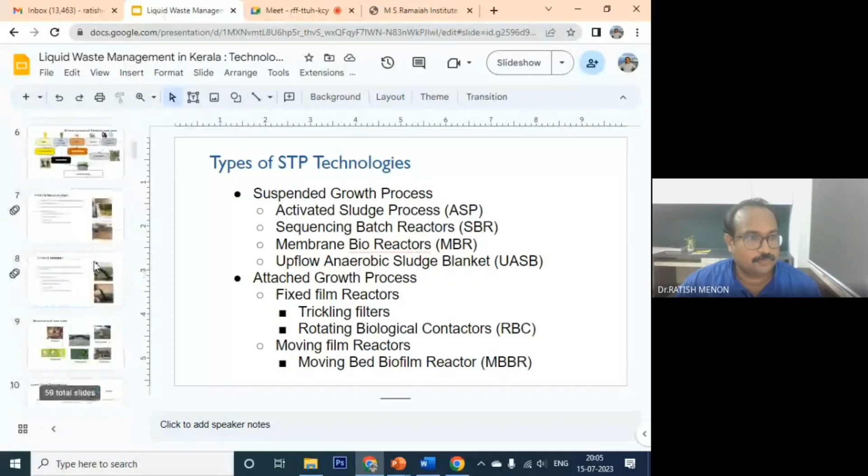Thank you. So today's topic of discussion is liquid waste management. As mentioned earlier, it is not only for Kerala, but liquid waste management is a problem for entire India. Among different states, in terms of liquid waste management, Kerala is lacking a lot of things, and a lot of efforts are being put in by the government to bridge that gap and excel in this domain. So it is a good time to have a discussion on liquid waste management technologies, as well as the different challenges we face in the state. Some of these challenges will be common, but some may be typical to the Kerala context. So that's the importance of today's topic.

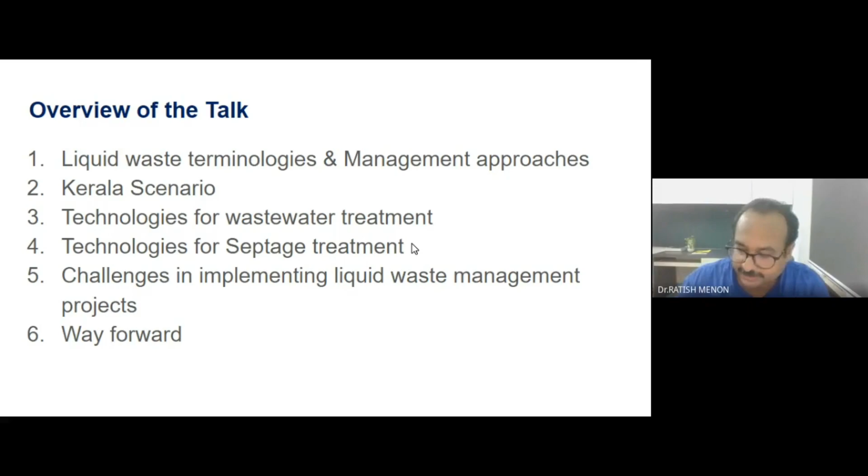Then we discuss the challenges in implementing liquid waste management projects in the state, as learned from previous projects executed in Kerala, like Amrit Kerala and Swachh Bharat Mission. All are working restlessly to implement several liquid waste management projects. So what are the challenges we are facing while trying to implement these projects? And finally, we open up our session for a panel discussion on what is the way forward for liquid waste management in the state. So that's how I have planned today's lecture.

So first, we will go through the liquid waste terminologies and management approaches. If you look at water, we always talk about water security. You would like to have water 24/7, but the water is getting scarce day by day. One of the major reasons for that scarcity is pollution of water sources, and not treating the water that we use becomes used water. Not doing enough treatment to this used water becomes a major cause of pollution and increases the water scarcity. The availability of good quality water reduces because of the surface pollution.

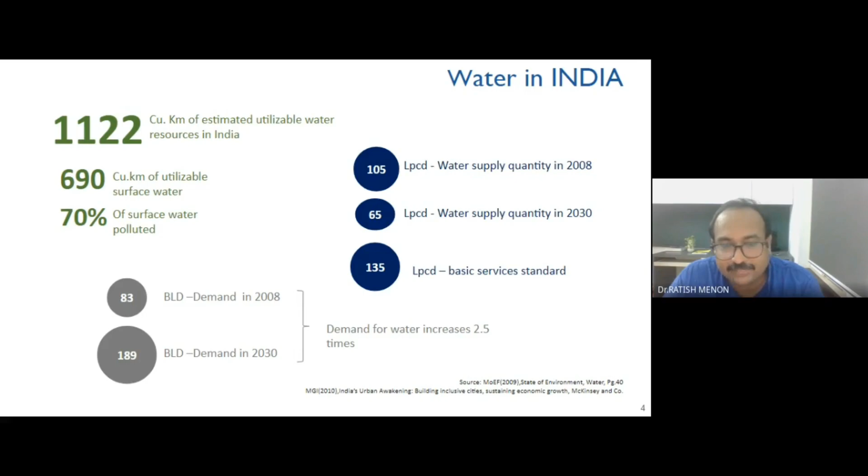So 70% of the surface water is estimated to be polluted now. As we move forward to another decade, by 2030, the scarcity is going to increase. The amount of water is going to reduce. The availability of good quality water is going to reduce. But at the same time, our lifestyles increase, our urbanization growth, and the demand for water is going to increase. So there will be a great divide between the supply and demand.

Now, looking at the per capita water consumption in urban areas, we are aiming for 135 LPCD, considering different activities like drinking, cooking, bathing, washing of clothes, washing of utensils, and so on. And we find it very difficult to provide this 135 LPCD adequately in Indian cities.

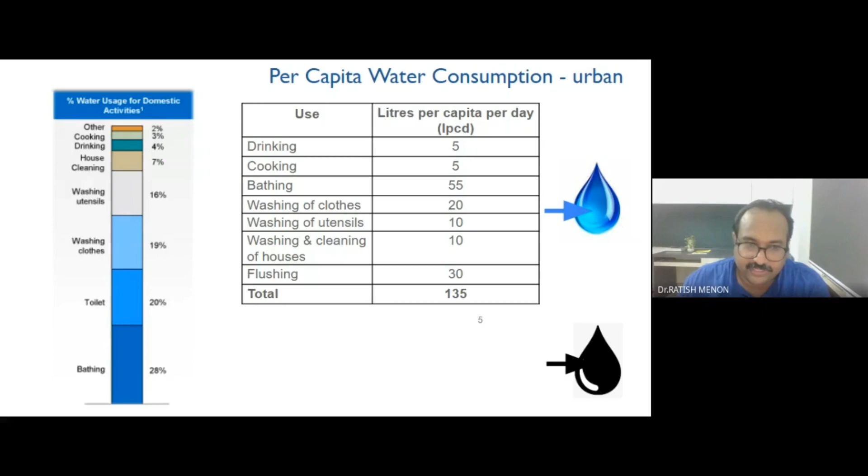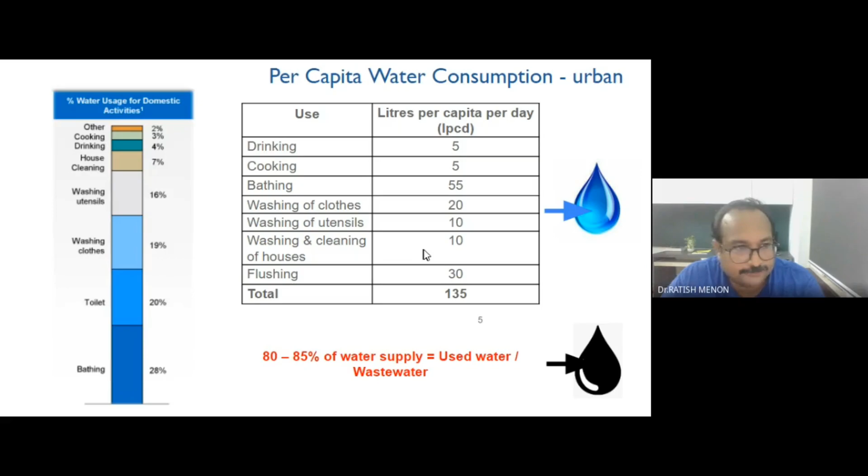And as we know, once we use this water, whatever water we are getting, 80 to 85% of this water supply becomes wastewater. So we talk about supplying water to homes, but we are not very much bothered about collecting it back, treating it, and then releasing it to the environment. So this 85% of used water is now being left out into the environment, thereby increasing water pollution and reducing the availability of good quality water. That's a major concern that we are having.

Now, looking at the sources of liquid wastewater, when we say liquid waste, we mainly talk about the domestic wastewater that we are receiving from cities. Depending on the nature or characteristics of this used water, we divide it into different color coding systems. So we have major categories: black water and gray water. This doesn't have anything to do with the actual color of the water, but it is color coded to indicate the content of the water. Black water means the water that contains fecal matter, so water coming out from toilets or urinals is called black water, and gray water is water that comes from different activities which does not contain fecal matter, for example from the kitchen, bath, laundry, etc. Black water combined with gray water, we use the term sewage. That's a general classification of used water.

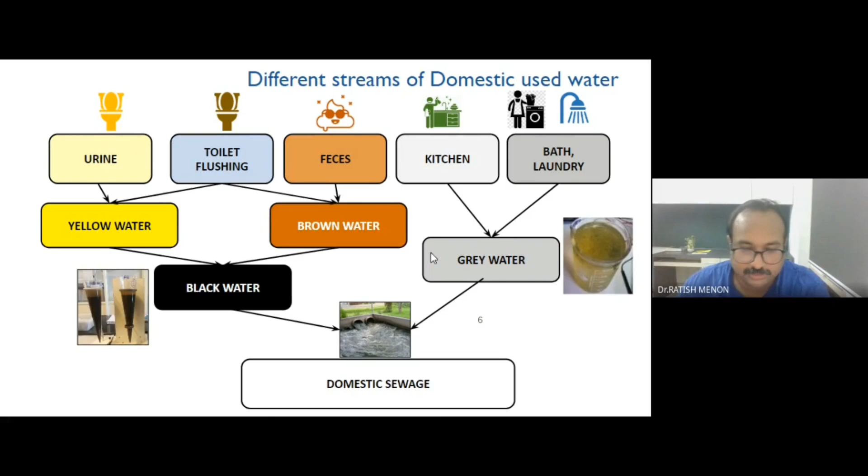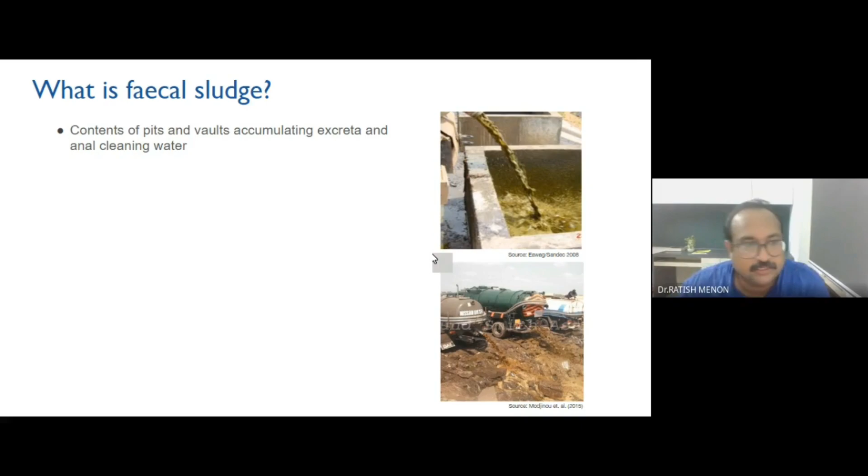Now, domestic sewage has both gray water as well as black water, and another term we should know is fecal sludge. When human excreta is contained in a pit, the sludge that we store or accumulate in that pit is called fecal sludge.

It has a very high solid content compared to wastewater, because the water content is lesser in the fecal sludge, and it is relatively fresh and the color is yellow, and it has low dewaterability, but it has higher BOD.

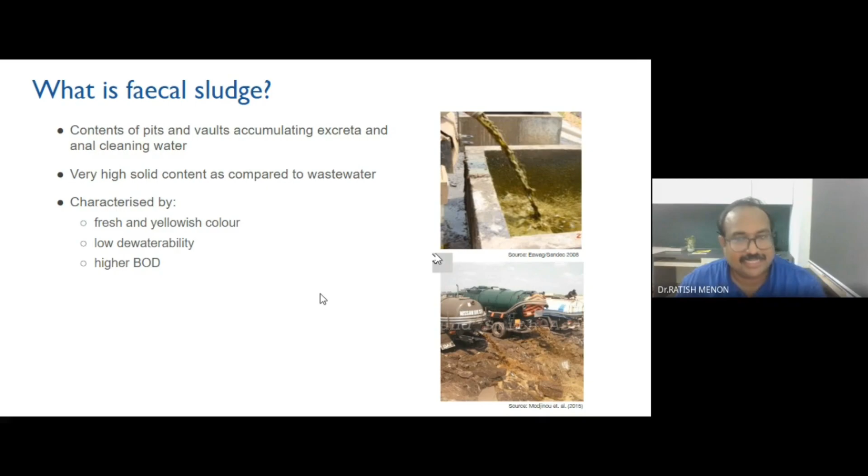BOD is a term that we generally use to indicate the strength of the wastewater. It is the amount of oxygen needed for microorganisms to degrade the organic components in the wastewater. So higher oxygen demand means higher strength of the waste. Fecal sludge has higher BOD compared to sewage.

Therefore it needs high degree of treatment before being released into the environment. If we are releasing a high BOD waste into a water body, for example, the microorganisms will start decaying that organic matter, and for that they will consume dissolved oxygen in the water. If the dissolved oxygen is consumed, it creates an anoxic, anaerobic condition within the water body, and that can cause problems to aquatic species. Aquatic animals may die out because of that.

So we can't just let this fecal sludge or sewage be disposed directly without any treatment.

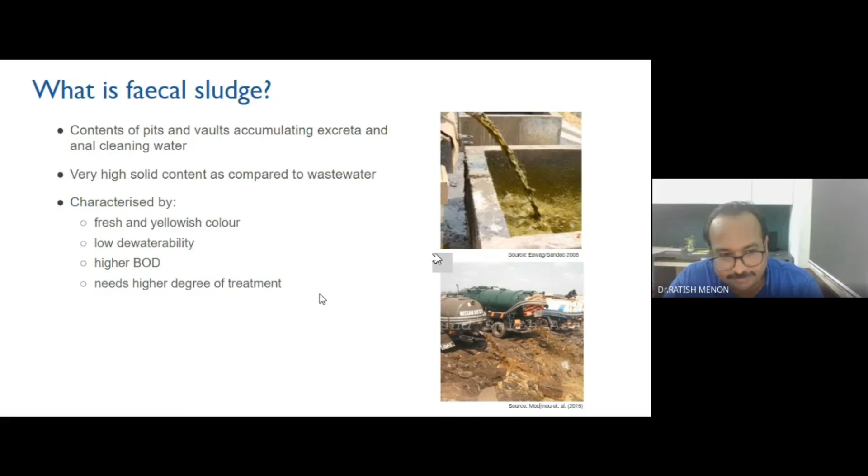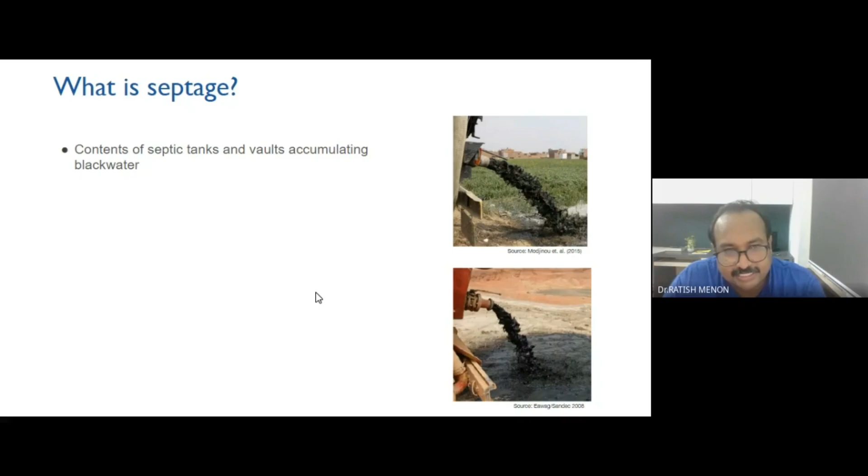Now another term that we use is septage. Septage and fecal sludge are different in a way - they both have high strength waste, high solid content, but septage is well digested compared to fecal sludge. It is the sludge that we take out from septic tanks. I will talk more about septic tanks in the later slide.

Septic tank is a system commonly used in Kerala for treating domestic wastewater. The black water from toilets is contained in the septic tank, which is basically an anaerobic biological reactor, and in that the organic matter gets well digested.

Now the digestion is only about 50 to 60%, and the remaining sludge needs to be taken out after 2 or 3 years, because the undigested part will start filling up the septic tank, reducing its efficiency. So we need to empty the septic tank once in a while, within 2 to 3 years. And this cannot be left without treatment, because there is still 40% organic matter that is not digested. So we have to have another treatment for that.

But the sludge that we take out from the septic tank, we call it septage. It has high solid content, but has lower BOD compared to fecal sludge, because it has already got digested inside the septic tank. So it needs a lower degree of treatment compared to fecal sludge.

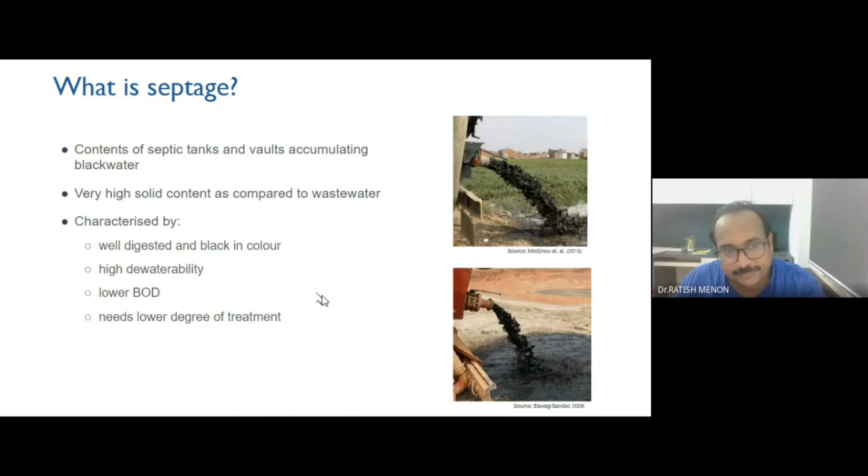Now looking at used water or wastewater, what are the different constituents? The wastewater contains organic matter, which is biodegradable, meaning microorganisms can act upon it and stabilize it. Then we have inorganic matter, inert materials. We have nutrients - nitrogen, phosphorus, and potassium. Then we have chemicals.

Recent developments in bathroom cleaners now contribute a lot of chemicals into the wastewater or sewage. So we have some chemicals and we have pathogens. Pathogens are the microorganisms that can cause diseases in human beings.

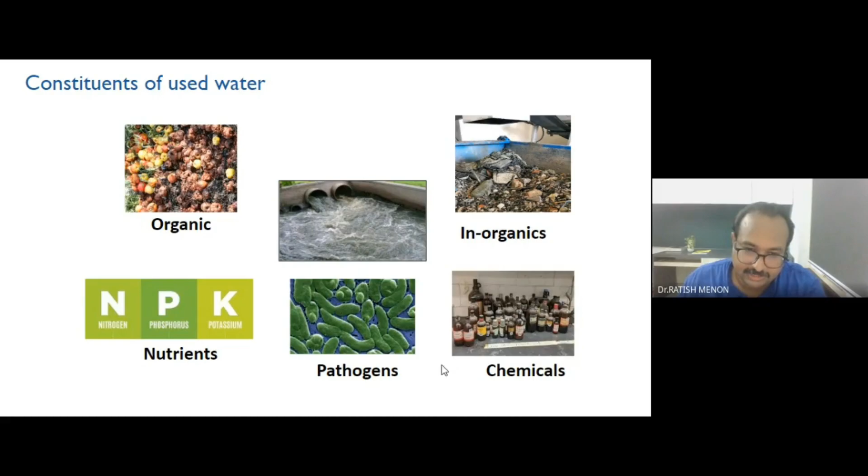Now looking at liquid waste characteristics - we mentioned fecal sludge, septage, and sewage. Looking at the major parameter called COD or BOD, it will be very high for fecal sludge, then septage, then sewage. Sewage is a little more diluted because it has more water content. Total solids also very high for fecal sludge, comparatively lower for septage, and lower for sewage. So the treatment we do for septage and fecal sludge is different from the treatment we do for sewage.

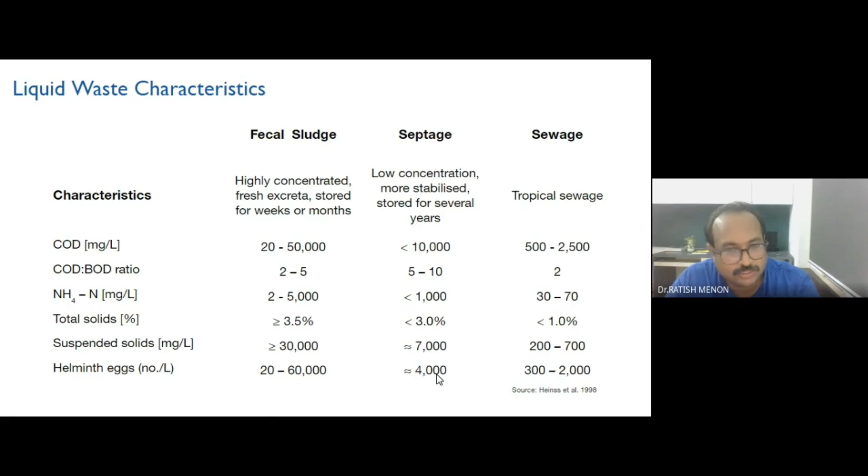Now, what happens when we release this wastewater into the environment without any treatment? There are two impacts - one is impact on the environment, and another is on public health. When we release it into the environment, it pollutes the surface as well as groundwater.

Contamination of fresh water results in biodiversity threat, and it affects the ecology, especially aquatic ecology. Then it affects socioeconomic and cultural aspects of the project area. For example, nobody would like to live very near a dirty canal or a dirty pond. So socioeconomically, land prices may fall, and poor people may have no other choice but to live very near this polluted water body, which in turn affects their health.

And some public nuisance also - mosquitoes, flies, all things will cause nuisance because of the pollution of the water body. Then health impacts include exposure to harmful microorganisms. Polluted water may contain a lot of pathogens like cholera, diarrhea, tuberculosis, etc.

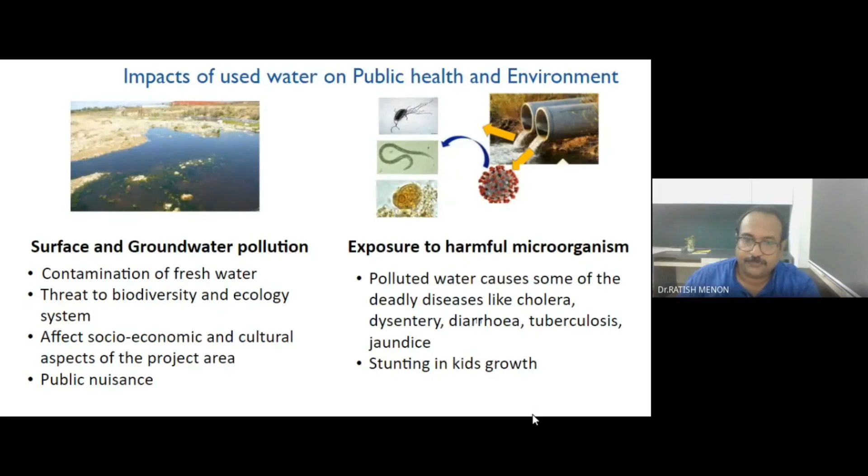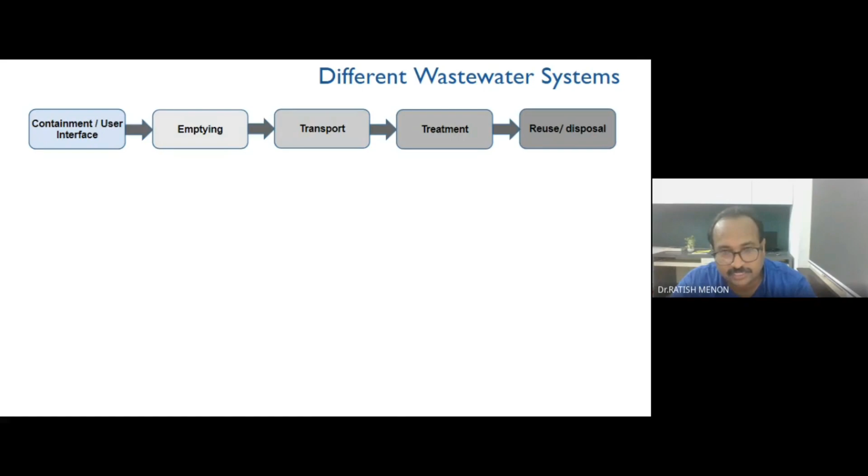Now, looking at different wastewater systems - how do we treat the wastewater? What are the different steps in treatment of wastewater? The first one is the user interface, meaning the toilet where people produce the waste. From the toilet, it has to be transported, and then it has to be treated. After treatment, normally it is disposed, or if there is a reuse value, we go for reuse. This is the general approach.

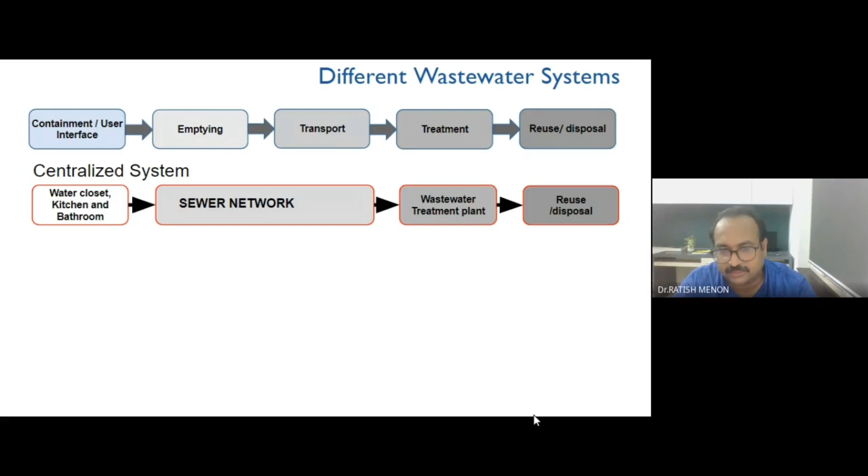There are different wastewater systems. The first one is a centralized system. In a centralized system, the different houses in the city are connected using pipes called sewers, and these pipes convey wastewater from the home to a treatment plant. So there will be only one single, big treatment plant - that's called a centralized system. All the houses are connected to this sewerage. The sewer network is called sewerage, and wastewater from individual homes is connected through this sewerage, and these sewer pipelines take the wastewater to a centralized treatment plant. There it is treated, and the water, after treatment, may be reused or disposed properly.

Another one is the decentralized treatment system, where waste from homes is taken to a treatment plant that will be smaller in size. The entire city may be divided into several zones, and each zone will be served by a different sewer network. So there will be a simplified sewer network for different regions, and more than one treatment plant of smaller capacity, and the processes may be the same. Water will be treated and disposed or reused, but the capacity of the plant will be smaller, and the sewerage system coverage will be divided into different zones, each serving different areas.

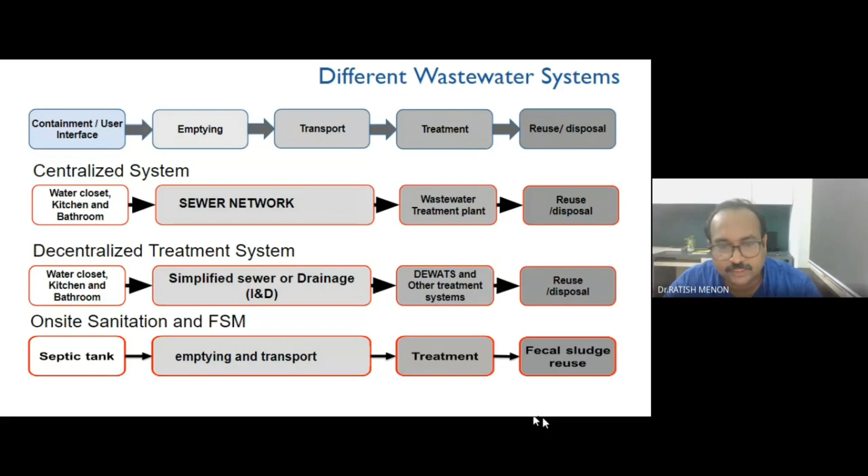The last one is the on-site sanitation or fecal sludge management system, and in the Kerala context it has very high importance, because most houses in Kerala use this on-site sanitation system called a septic tank. From the household toilets, the wastewater first goes into a septic tank, where it gets partially decomposed by anaerobic treatment - microbes that grow in the absence of oxygen work to decay the organic matter in the wastewater. Once the septic tank sludge fills up, it has to be emptied and transported to a treatment plant. This treatment plant, where the septage - the sludge taken from the septic tank - is treated, we call a fecal sludge treatment plant, or FSTP. After treatment, the fecal sludge may be used as fertilizer or manure, and the water may be treated and reused or disposed. These are the different wastewater systems adopted in different cities.

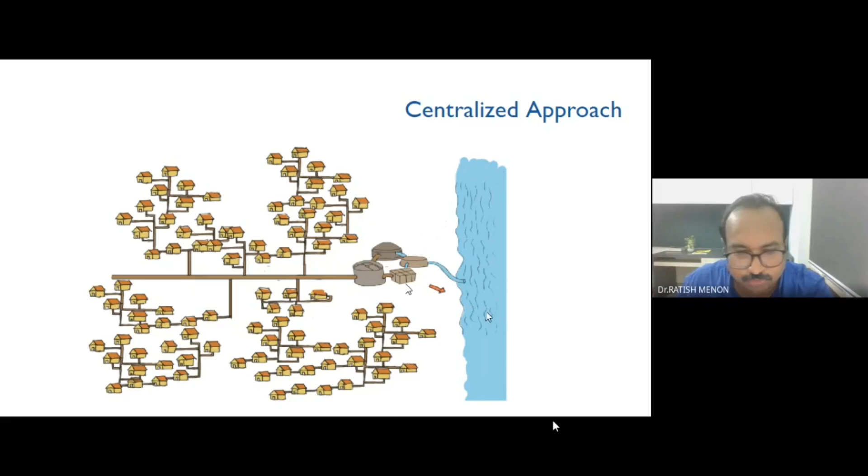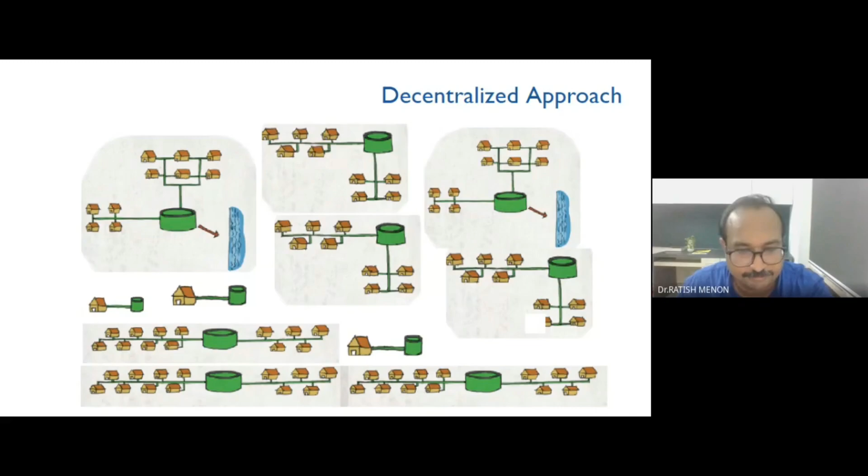When it is decentralized, the entire city is divided into different zones, and we have more than one treatment plant within the city, with different houses connected to different treatment plants depending on the urban plan.

So actually, this is called a sanitation cycle. The waste is now converted into agricultural produce, thereby completing the cycle. This completion of the sanitation cycle is very important to maintain the balance in the environment. So if any of the steps fail, then we have a serious problem.

We have to have the toilets, that is a must, and we have accomplished a lot in that aspect. Kerala is a state with the maximum number of households having toilets. All of the new houses have toilets built in. So that capture part is well handled in Kerala.

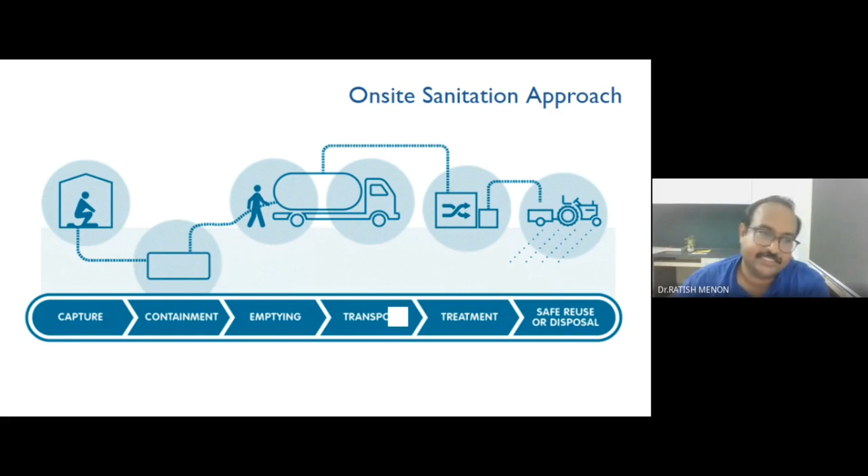FSTPs have to come in, and once they are in place, the septage can be well treated in the FSTPs, and then the treated products can be used for agricultural purpose, thereby producing agricultural produce and completing the sanitation cycle. So these are the different approaches.

Now, if you ask which approach is better, there is no single answer, because it depends on a lot of factors like local conditions, needs, cost, and time frame, which determine the choice of approach. In some cities, a centralized approach may be well suited, but for many other cities, a decentralized approach may be good. And in many other cities, an on-site sanitation system may be a good approach. So it's not that one approach is better than the other—it depends on local conditions, cost, and other parameters.

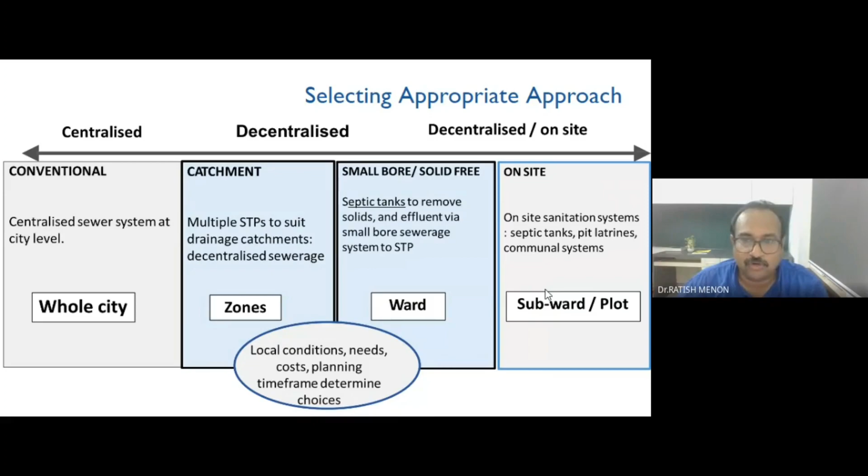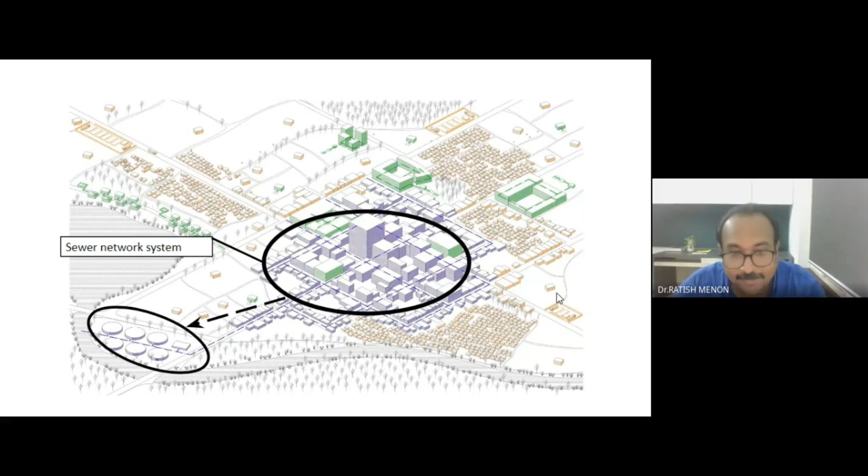But for the outer part of the city, beyond the core sanitation zone, it would be a good idea to provide decentralized systems, because the population is scattered, and connecting all of them together may not be feasible. So ideally, we provide small treatment plants in this area and go for a decentralized wastewater treatment approach.

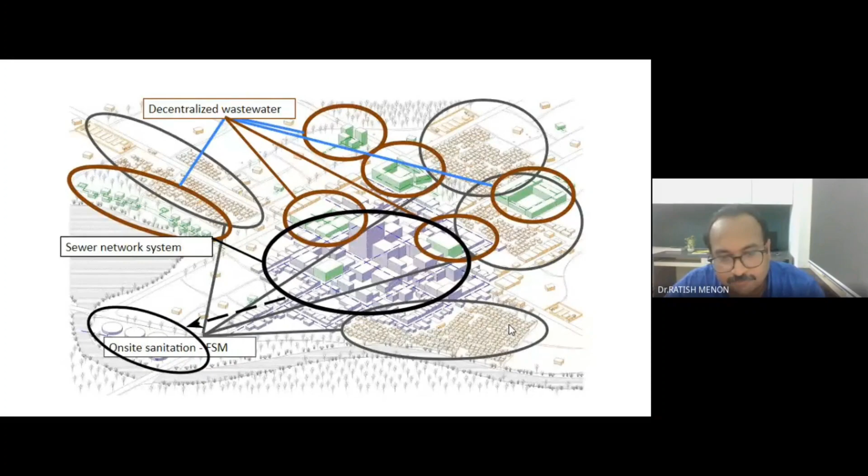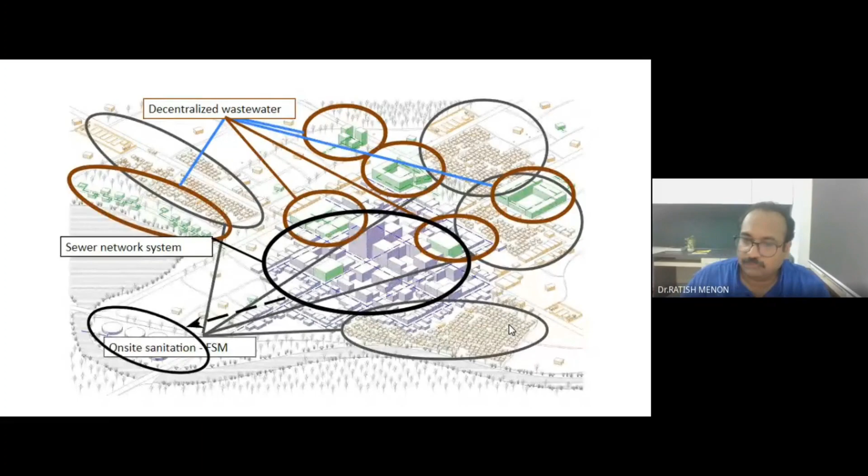And for other places where on-site sanitation systems are already in place, like septic tank facilities, we provide FSM or the treatment plant, FSTP. We carry the sludge and take it into the FSTP to treat it. So for the same city, we may need more than one approach, and that is why we call it integrated thinking, which is required to solve the sanitation needs.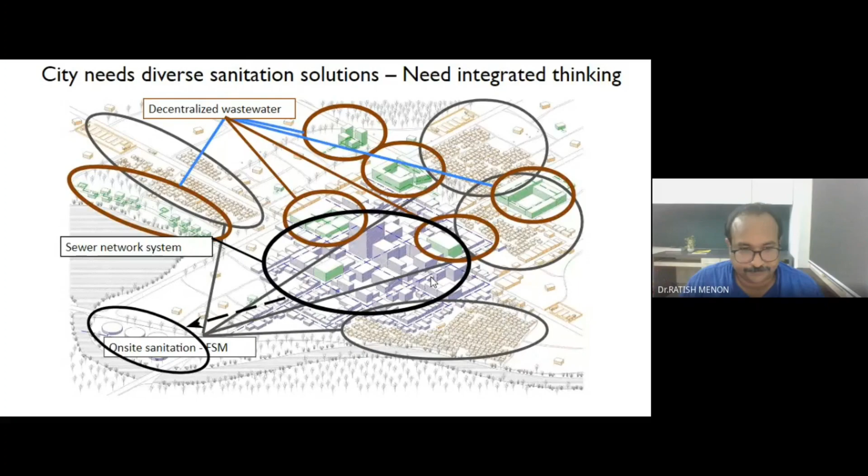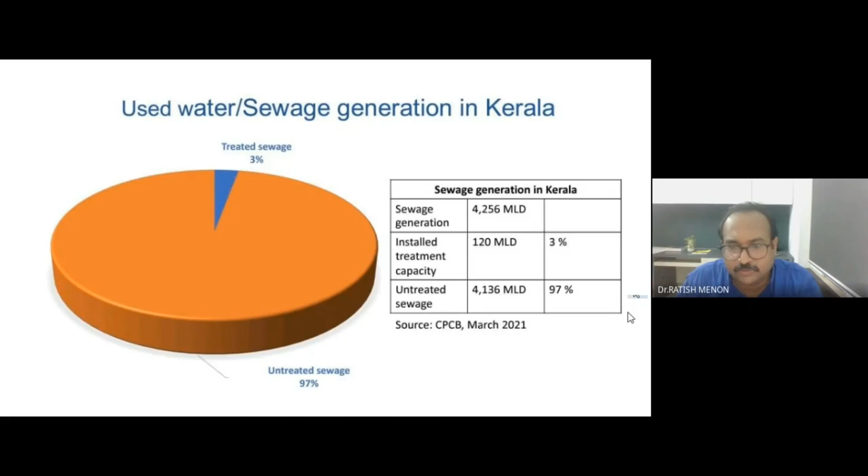Now coming over to the second part of the talk, the Kerala scenario. Within Kerala, the treated sewage is very little—only 3% of the total generated sewage is scientifically treated in Kerala, and this is what we are trying to improve. If the sewage generated is around 4,000 MLD, out of that only 120 MLD is the installed treatment capacity.

If you look at the cities with sewer networks, there are very few cities that have sewer network coverage. Trivandrum is one of the cities that has 30% or so coverage. Kochi has a little bit of coverage, but other than these two cities, we do not have much connected sewer network coverage in cities, and that is a big problem because all these cities are highly populated.

Now creating a sewer network at this point in time may be very difficult, because it includes excavation and pipe laying, and the roads are very small and not wide enough for conducting all these activities, so it becomes very challenging to implement a sewer network in the cities of Kerala.

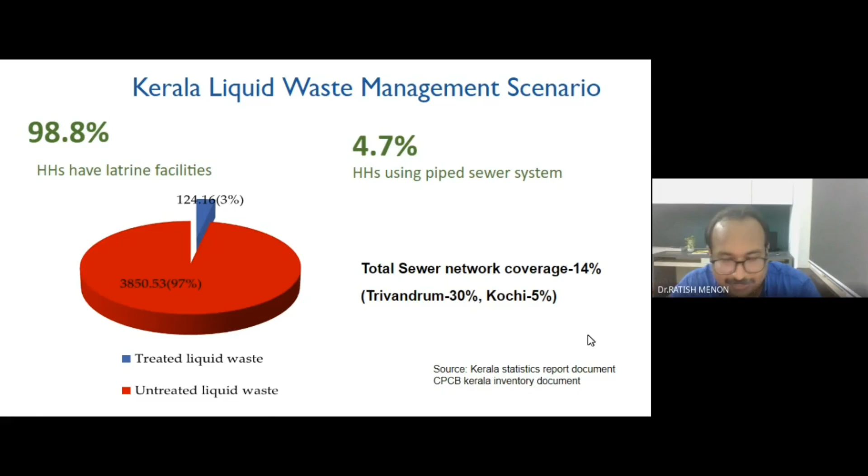So what we see here is 98.8% of households have latrine facilities. They have toilets, but only 4.7% is connected to a sewer system. That means most of them are using on-site sanitation, or they are directly throwing waste into the environment. So that's the main issue.

Under the initiative of Swachh Bharat Mission, there was a campaign to look at the quality of water in canals, ponds, and rivers in the state. And the results were astonishing, because 80% of the water bodies were found to contain coliform bacteria. Coliform, as we know, is the bacteria that grows inside our intestinal colon.

Their presence in drinking water means that fecal matter has been in contact with the water. Now why is this happening? It's because, as I showed in the previous slide, around 98% of houses have toilets, but the sewerage network is very small. So this wastewater is being let out into the environment, and we see that in major water bodies of Kerala. The streams that used to flow very beautifully are now contaminated, and in Alappuzha and other places, water hyacinth is a problem because it's getting a lot of nutrients coming into these canals, and those nutrients are nothing but wastewater.

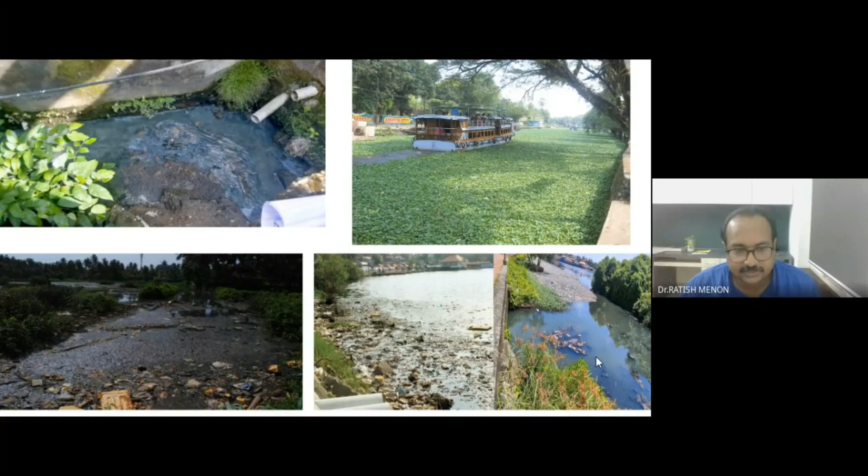In major water bodies and major canals, people are actually throwing their effluent directly into the urban water body, thereby contaminating the water as well as degrading the water body, which is not good considering the tourism value of the state. This needs serious consideration for improving the wastewater treatment scenario.

Now, looking at the existing on-site sanitation systems, one major issue is constructing a proper septic tank. Most of the time, people say they have septic tanks, but these are not really septic. What I mean is that the septic tank has to be airtight, because there should not be any oxygen inside. The bacteria that grow inside are anaerobic bacteria, which grow in the absence of oxygen, and they take around 48 hours or so to decompose this waste. So we have to hold the water for that long inside the tank, and it should only be allowed to flow out of the system after 48 hours.

So if there are cracks, or if the bottom is not lined properly, there are chances that the wastewater, before treatment, will percolate downward and reach the groundwater, contaminating it. If the construction is not properly lined, it can cause infiltration, and cracks can also prevent the tank from staying septic. Oxygen can get inside, the bacterial action will slow down, and it won't work as intended.

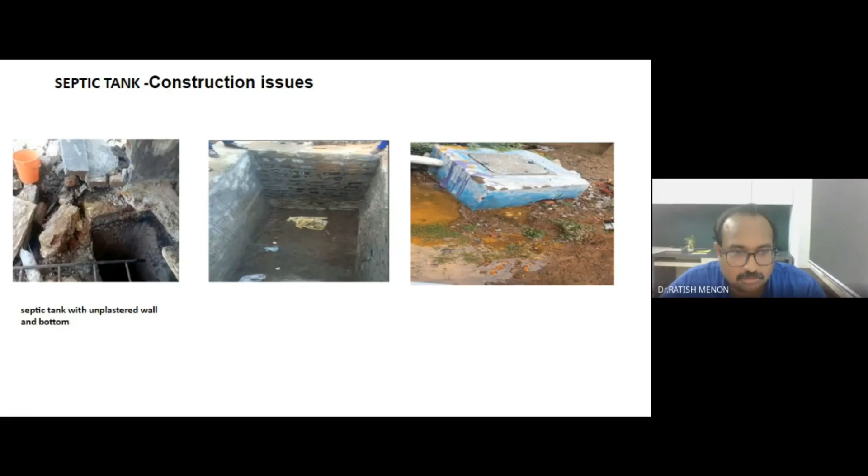You see a septic tank system here. Normally we must use at least a 2-compartment septic tank for better solid retention. When wastewater comes into the septic tank, we provide a holding facility, and there we allow the solids to settle in. The solids settle to the bottom, and the effluent then goes into a soak pit. Inside the septic tank, bacterial action takes place and the sludge gets treated.

Around 40-50% treatment happens, but there will still be sludge buildup. So after 2-3 years, the septic tank fills up with this partially digested sludge. Once it fills up, the water holding capacity of the system reduces. So instead of a 2-day hydraulic retention time, the flow may bypass, because there is no volume to contain the water for 2 days, and efficiency decreases. So it's very important that septic tanks are emptied once every 2 or 3 years to improve their efficiency. Otherwise, the septic tank will not function as designed.

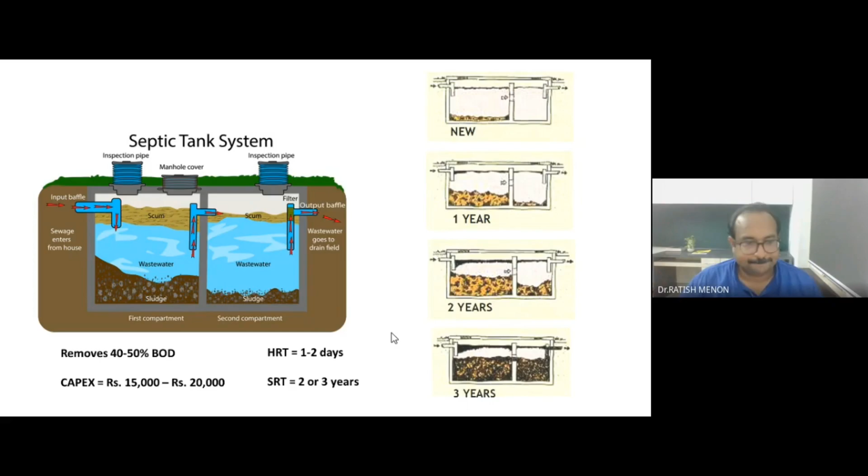The current situation is a lack of proper septic tanks at the household level. Some are called septic tanks but are not actually septic tanks. There are IS standards and IS codes for the construction of septic tanks. A lack of adequate treatment plants is a major issue, along with a lack of systematic collection, transportation, and conveyance. In some places, they collect the septic waste and just throw it out in the field.

So when we say open defecation free, we are not actually open defecation free, because unless we are treating the septic waste, it will be thrown out into the environment and have the same impact as open defecation.

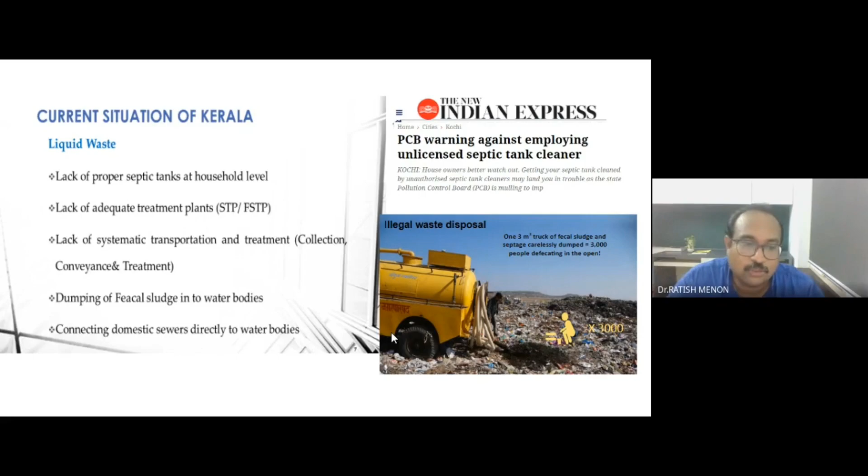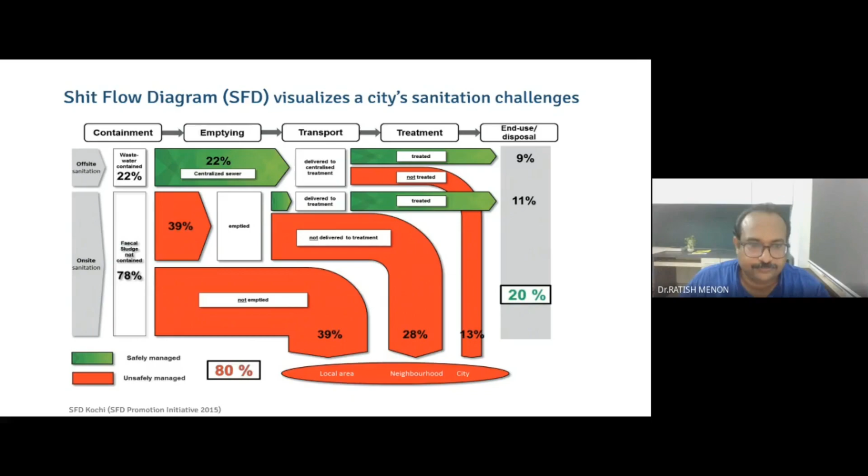Now let's look at technologies for wastewater treatment. Whatever the treatment mechanism, we use either physical, chemical, or biological methods. When dealing with domestic sewage, which has high organic content, we mostly go for biological methods because they are cheaper and also very effective in treating organically degradable waste.

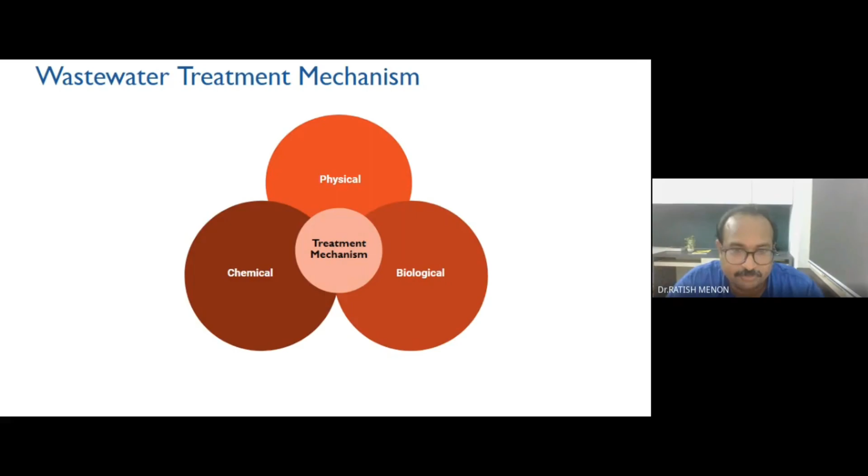The high priority objective of treatment is to make the water pathogen free, so whenever we dispose of treated wastewater, it should be pathogen free, and organic load should be reduced. If we don't reduce the organic load and dump wastewater into an urban water body, lake, or river, microorganisms immediately start consuming oxygen, reducing dissolved oxygen and killing aquatic animals. Acidic conditions may set in and it will kill the water body. So organic load has to be reduced.

Depending on how much has to be reduced, we select the treatment technology. For example, if my initial BOD is 100 and discharge standards are 10, I have to remove 90. But if my initial is 250 and I have to bring it to 10, I have a lot more to reduce.

So my processes will be different because I have to come down from 250 to 10 instead of 100 to 10, and if the initial is only 50, the process will be different again. The disposal standards are already set by pollution control codes, so independent of your incoming waste strength, you have to obey the disposal standards, and based on that difference, we bring in the treatment process.

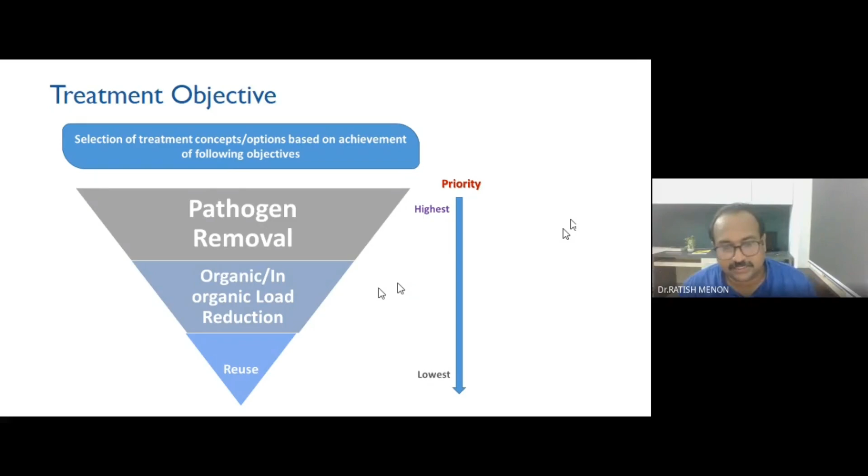Looking at sewage treatment technologies, we majorly use electromechanical or conventional treatment systems. If the wastewater quantity is small, we can go for nature-based treatment, which has its own merits and demerits. Then there are post-treatment methods like tertiary treatment with RO, where wastewater is passed through a membrane to make it good enough for drinking purposes.

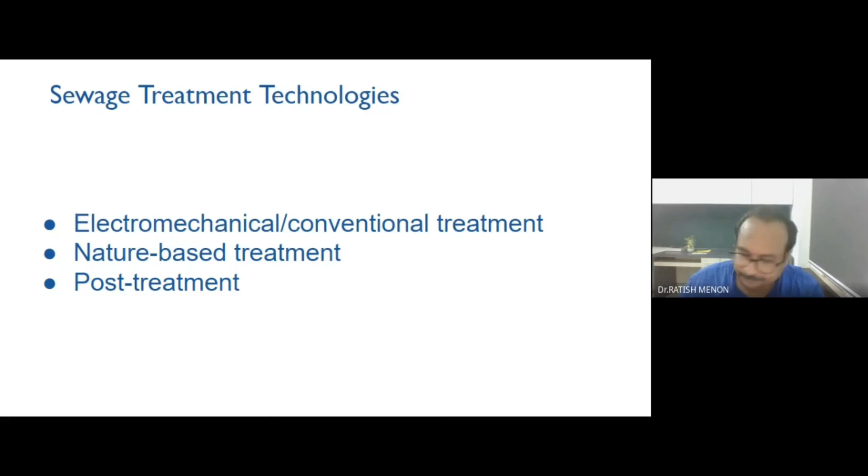In the conventional electromechanical treatment system, whatever the technology, you'll see these 4 steps in every treatment plant. The first is primary treatment, where you do screening and remove solids, then primary sedimentation to reduce the BOD load onto the treatment plant. If you can settle out the solids, you can reduce the BOD a lot, because the settled sludge can be taken out and treated, reducing the load on the secondary and tertiary steps.

Then the major component of a treatment plant is the secondary treatment system, which is essentially a biological reactor. We grow microorganisms there, and most electromechanical sewage treatment plants utilize aerobic conditions, so we have to supply oxygen 24/7 for aerobic microorganisms growing in this secondary treatment tank.

Depending on how these microorganisms are growing inside the tank and how they are nurtured, there are a number of different technologies. In secondary treatment, the basic approach is to allow aerobic microorganisms to grow inside the tank, and we provide the oxygen required to decompose the incoming waste. If the waste strength is higher, we have to provide more oxygen, so the waste has to be held in the tank for a longer time period.

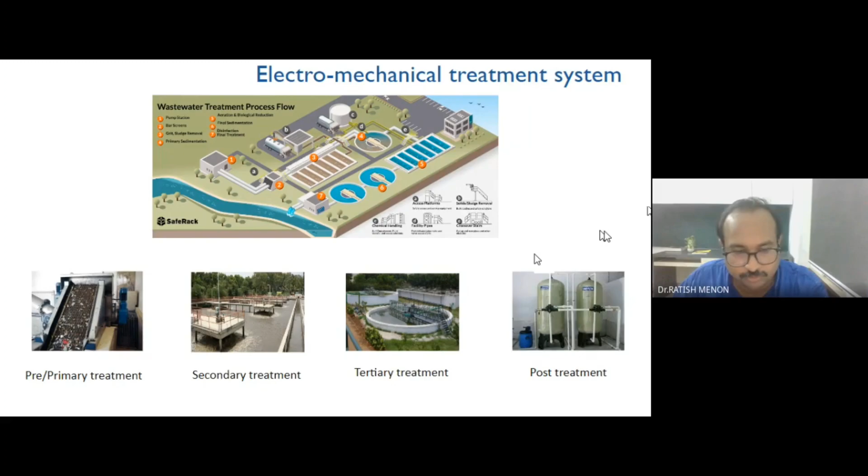Now, depending on the secondary biological reactor, this secondary treatment, there are many different processes used. The microorganisms can either be suspended inside the water in the tank, or attached onto a surface. If suspended, there are many techniques using the suspended growth process.

The popular method is activated sludge process, ASP. Then there is sequencing batch reactor, where the processes are the same, except it uses only one tank, where extended aeration and settling all happen together.

Then there is membrane bioreactor, where microorganisms are grown like in the activated sludge process, and then using a membrane, we filter out the wastewater. Once the water passes through the membrane, it will be much clearer than with a conventional system. Membrane bioreactor helps avoid a secondary or tertiary system — we don't need a secondary clarifier, which is the tertiary treatment system, if we are using membrane bioreactor.

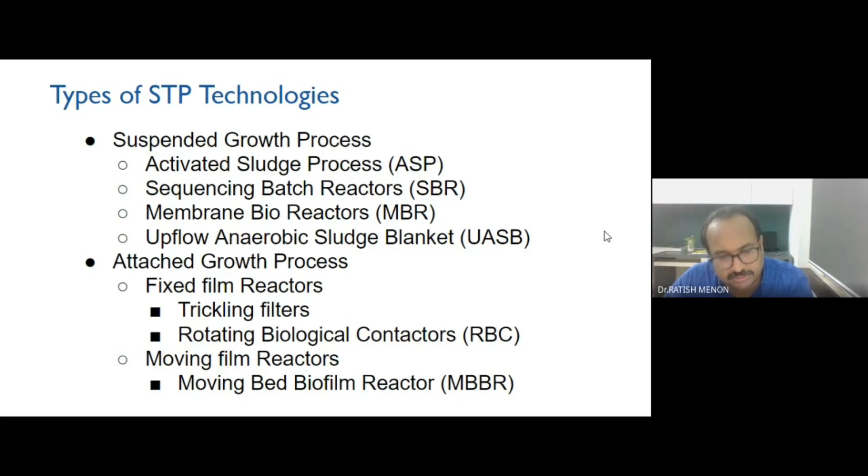In the MBBR system, you have media like these rings, and the microorganisms grow on the surface of the ring. This media moves inside the reactor under the influence of aeration, so the bacteria is moving, but at the same time growing on the surface of this media. This makes it a bit more efficient than conventional ASP.

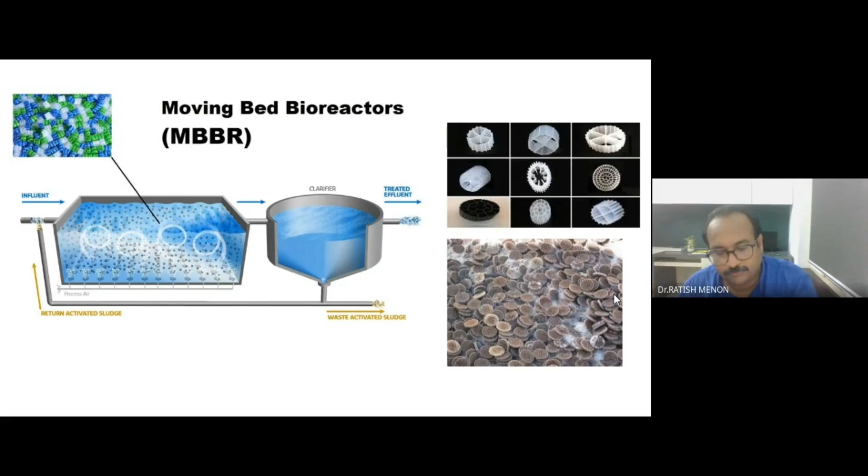Membrane bioreactor is another technology. It's very compact and high treated water quality is possible, with a high volumetric load also possible. Conventional ASP can be upgraded using this membrane bioreactor. The advantage is no secondary clarification is needed, because the water already passes through the membrane, so we don't need a settling tank to remove the solids.

The disadvantages are higher capital cost. Operation and maintenance cost is 20% higher than ASP. There can also be issues like membrane fouling, because organic matter passing through the membrane gets attached onto its surface, causing fouling, which increases operation and maintenance costs.

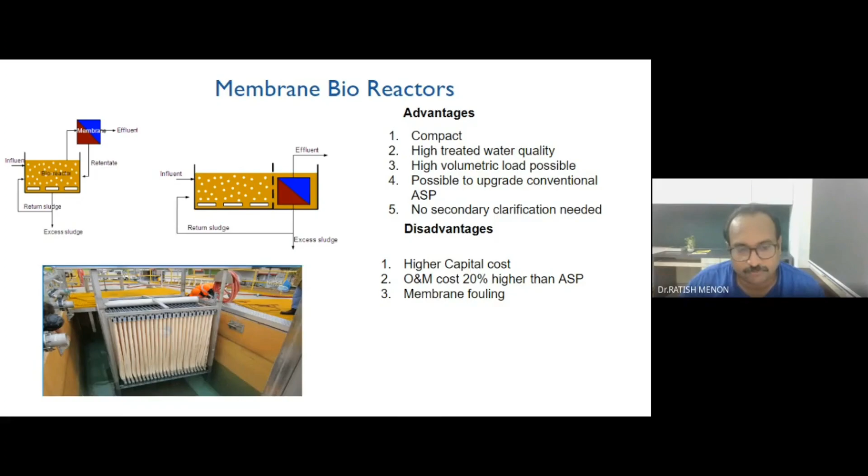Another treatment system for sewage is the nature-based treatment system, where we fully depend on a wetland, a constructed wetland, and we are actually mimicking what happens in nature. So when wastewater is let out into nature, what happens to it?

A part of it may percolate through the root zones of the plants, and the plants will pick up the nutrients, and also the microorganisms that grow in the root zone will decompose the organic matter, thereby reducing the strength. So this natural process is unique in the nature-based treatment system. There are many different nature-based treatment systems like horizontal flow, vertical flow, constructed wetland.

When the wastewater passes through the root zone, the microorganisms within this gravel bed grow as a biofilm on the surface of the gravel, and they decompose the organic matter. The plants take up nutrients like nitrates or phosphates, and they grow.

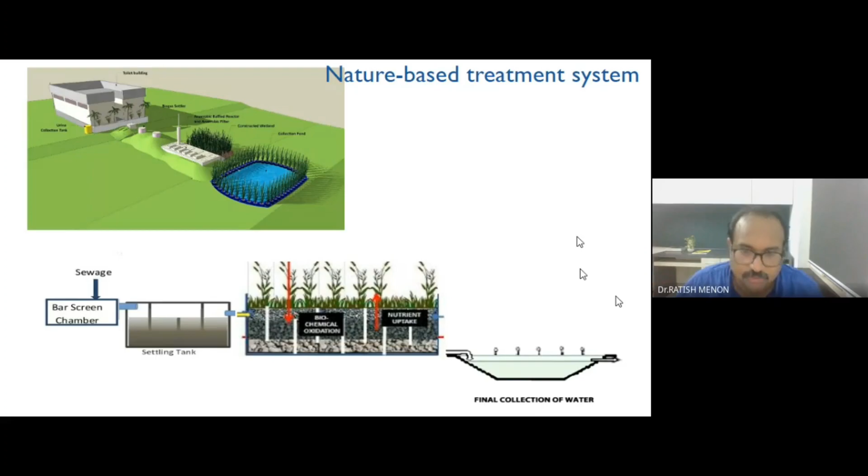There are limitations because it needs a lot of land area. Another thing is it may cause nuisance in the surrounding, it may cause some smells if it's not properly working. So these things are a problem.

But for small communities, apartments, this is a very doable thing, and it will also look very nice in terms of landscaping features. So we can design this as a landscaping feature in that community. These are some images of such systems being implemented at different places.

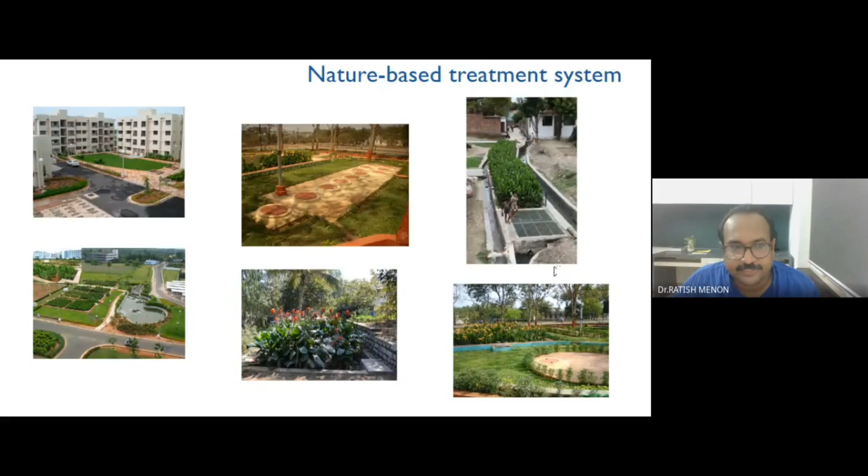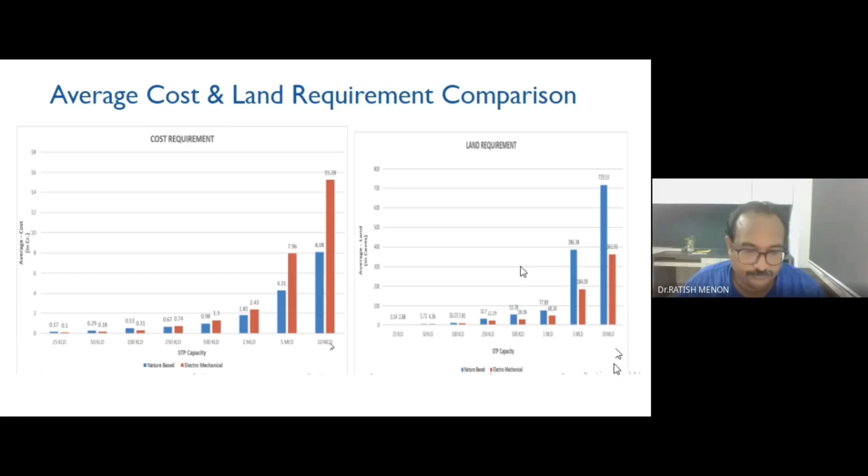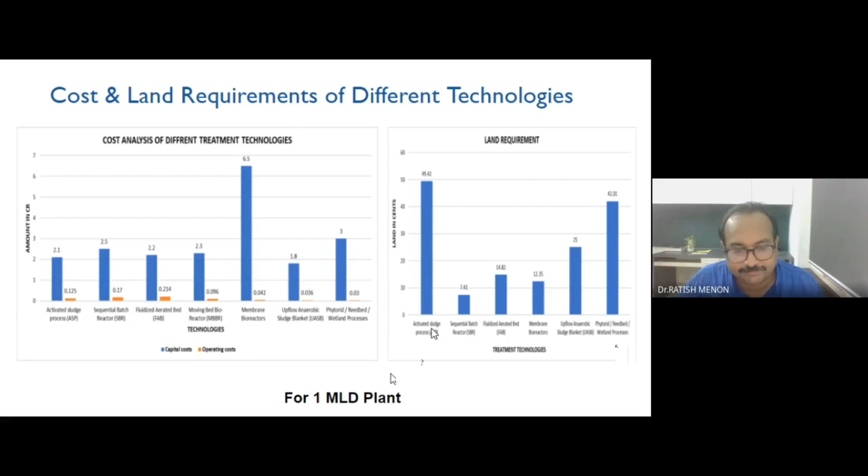Now coming on to, so far we have been discussing sewage treatment. Now looking at septage treatment. The septage treatment is a little bit different from sewage treatment in the sense that it has high solid content in the septage.

The separated solid is stabilized, dewatered, and we reduce the pathogens, and then it is made into compost or fertilizer, so that it can be used for agriculture.

Now, in solid-liquid separation, you can have physical treatment, like settling tanks, thickening ponds, and the like. Then in stabilization, you can have biological treatment like a digester or anaerobic reactor, where this substrate is again allowed to get digested anaerobically. It is already digested up to 50%, but it is again tried to digest to reduce the organic solids.

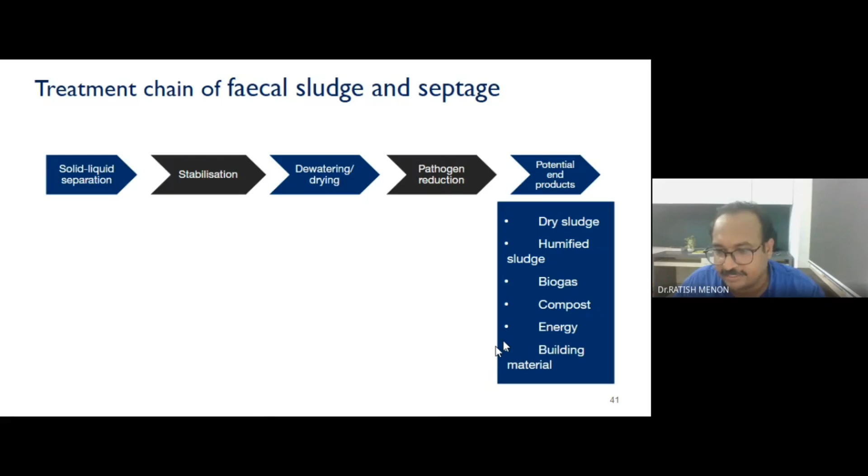Or you can disinfect, or incinerate this sludge to make it into biochar. Then this can be utilized for agriculture as different end products, either as dried sludge, biogas, or compost, like that.

So one of the very simple techniques of sludge treatment is deep trenching. It is not advisable in places with a higher water table, because there is a high chance of groundwater contamination. But it is simple in operation, used when the quantity of septage is very small, like 3 KLD only. Large area is needed, and if you see in Kerala, it will be very difficult to do this kind of septage treatment. But if a house has a lot of land, then they can do their septage treatment in their yard.

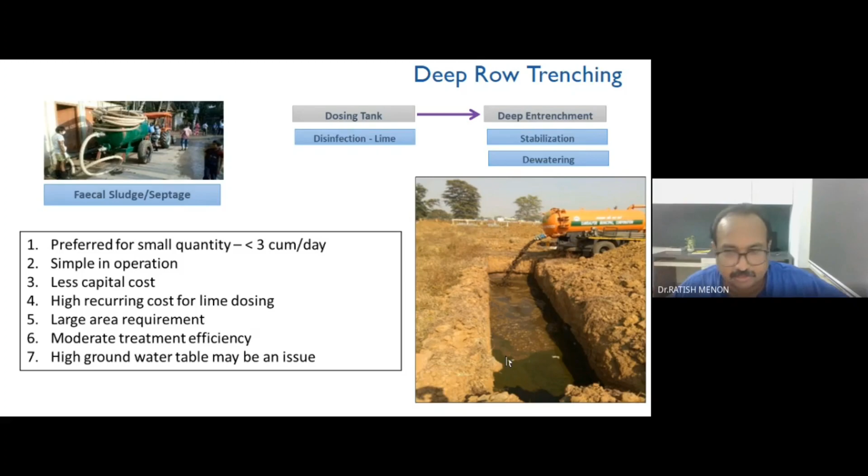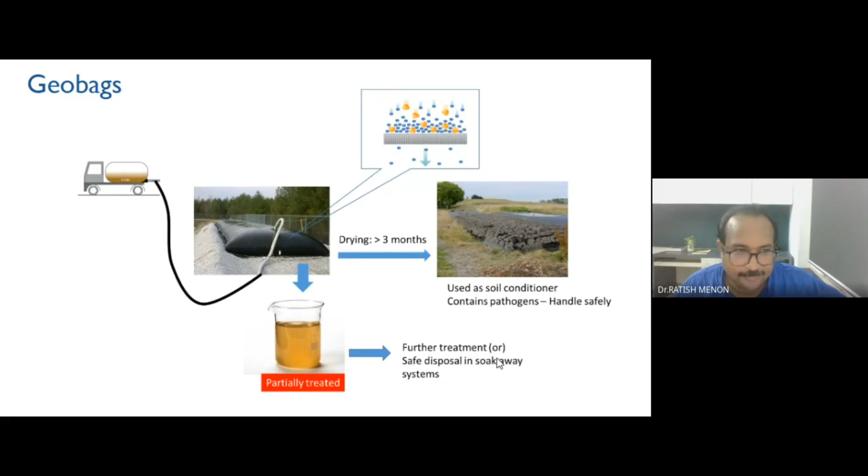That is possible. Then another one is the geobags. Geobags are membrane bags where you fill in the septage, and once it is full, under pressure, it will bleed. The water will escape through the pores of the membrane, and the solids will be retained inside the bags, and we keep it for 3 months for drying. After that, the bag is taken out, the solids are taken out and used as manure. So this is the geobag technique for septage treatment.

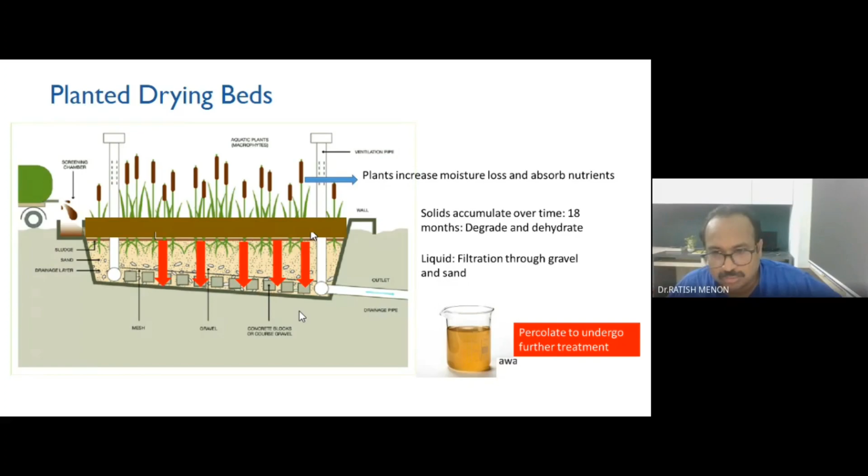Natural based treatment is called planted drying beds. Planted drying beds is nothing but similar to a constructed wetland system, where we have a gravel bed over which the plants are growing. Sludge or the fecal sludge or septage is then introduced on top of this gravel bed. The water will percolate and be taken out for treatment, and the sludge will be retained at the top of this gravel bed, and it will remain there for 18 months or so, degrade, dehydrate, and become compost.

So during the loading phase, the septage is actually open to atmosphere. So there can be nuisance - fly nuisance, or smell, or mosquito breeding in this situation. So it is not advisable to keep this kind of plant in a highly populated area. But if it is a rural area and you have a lot of land, this is a very simple method, and is also cost effective.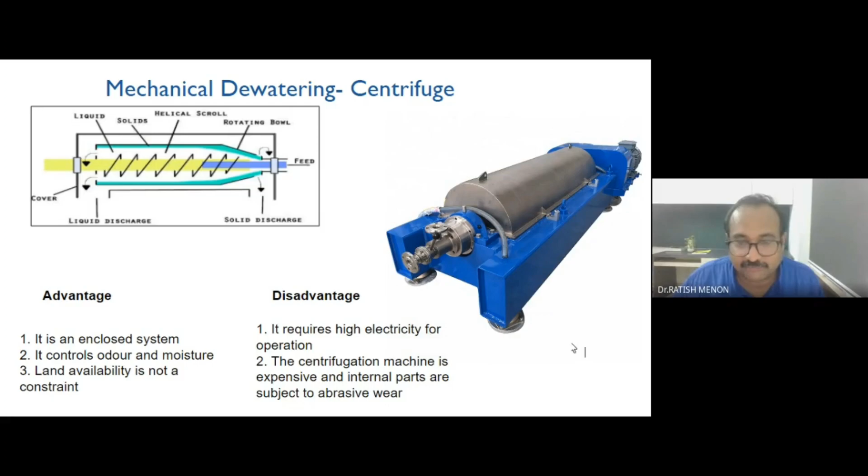So this is a centrifugation machine where the sludge is introduced, and after centrifugation, the dried solids will be taken out, and the water will be taken for treatment.

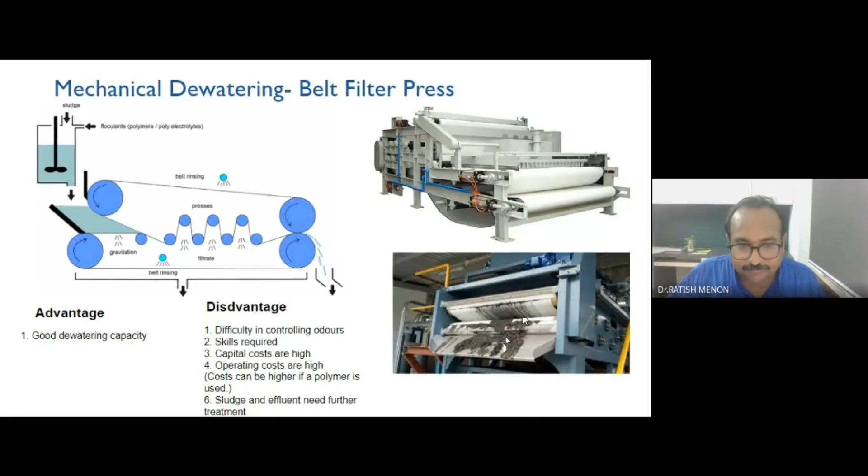Then another one is the belt filter press, where the septage is allowed to pass through the filter, and it has good dewatering capacity. It's very difficult to control odor because it's an open system, there will be odor in the plant. Skilled labor is required because there are a lot of moving parts, so maintenance costs will be high, capital cost also high. And after dewatering, the sludge needs further treatment.

Another method of sludge treatment is pyrolysis. In Kerala-like conditions, when we have rain for at least 6-7 months and also high humidity, it may be difficult to have a drying bed. So after dewatering, we can do thermal drying and then pyrolysis to create biochar. And this biochar has good fertilizer value.

So this kind of plant will have lesser footprint, independent of weather. There will be less public protest because of smell and other issues. And the handling of treated sludge is also easy because the sludge now comes as biochar. Disadvantages, of course, are that capex and opex costs are high. Skilled labor is needed, and because pyrolysis is happening, there are chances of air pollution, so air pollution control devices have to be implemented. For a similar plant in Warangal, they implemented a 15 KLD plant. The cost was around 2.1 crores. That shows how expensive it is.

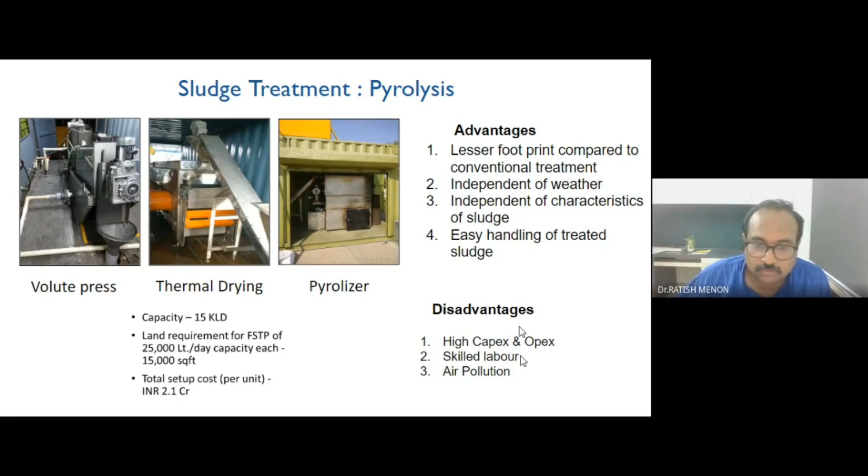Then there's the mobile treatment unit. Many of you must have seen it. It was developed by Wash Institute. It is a very small treatment unit mounted on a vehicle. This can go to a home and clean the septic tank right there at the house itself. So it's a domestic level decentralized septic treatment. What they do is solid-liquid separation using a membrane filter, and after that, the liquid is again treated in a membrane.

Sludge thickening is done using a centrifuge because the quantities are very small. The machineries are compact in size. Treated effluent meets the standards of CPCB, so that's not an issue.

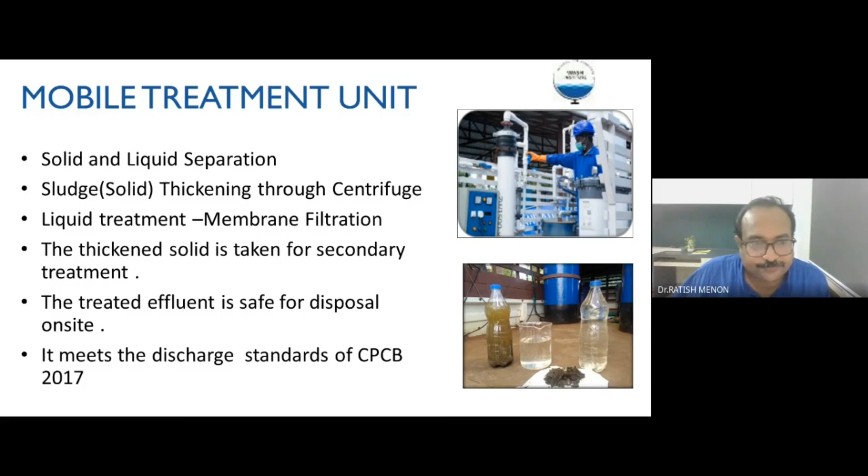Now, we have discussed sewage treatment technologies and septic treatment technologies. Now let's look at what are the challenges in implementing the projects.

We should know that there is no best technology, as such. You always have to select the best appropriate technology. One technology may be very feasible in a particular city, but not feasible in another city. So depending on different parameters, we have to select the technology. These are the list of parameters that we have to consider while selecting a technology.

Influent characteristics, climate constraints, cost, performance, complexity of operation, chemical requirement, energy requirement, land availability, what we do with the treated residual, or how we will dispose the treated wastewater. All this matters in selecting the technology. So it's a multi-parameter selection criteria.

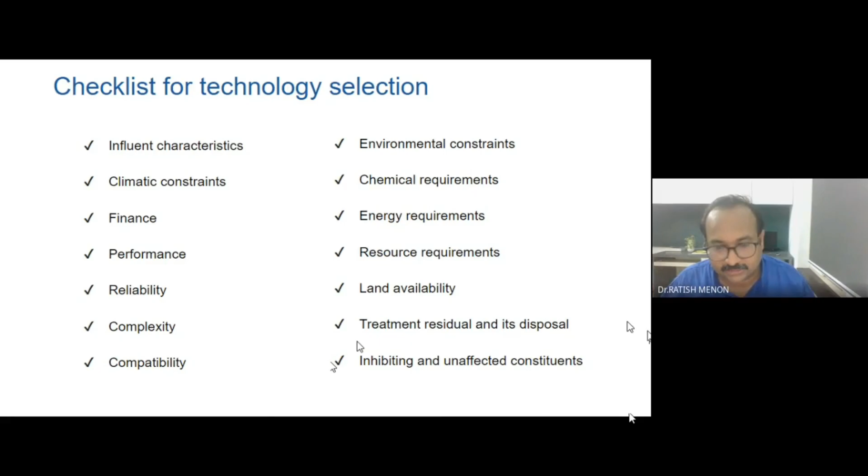Now, when we look at the AMRUT scheme, there are two ongoing schemes. One is AMRUT. There are 9 cities which fall under the AMRUT scheme, where the focus is on creating STPs as well as FSTPs. In these 9 cities, a total of 5 septage treatment plants and 10 sewage treatment plants were proposed.

But so far, we could only complete 2 STPs. So still a lot of work needs to be done to satisfy this proposed capacity, like 27.75 MLD proposed capacity for STPs, and 0.32 MLD proposed capacity for FSTPs. So far only 2 STPs have come up, and remaining cities are working hard to achieve this target.

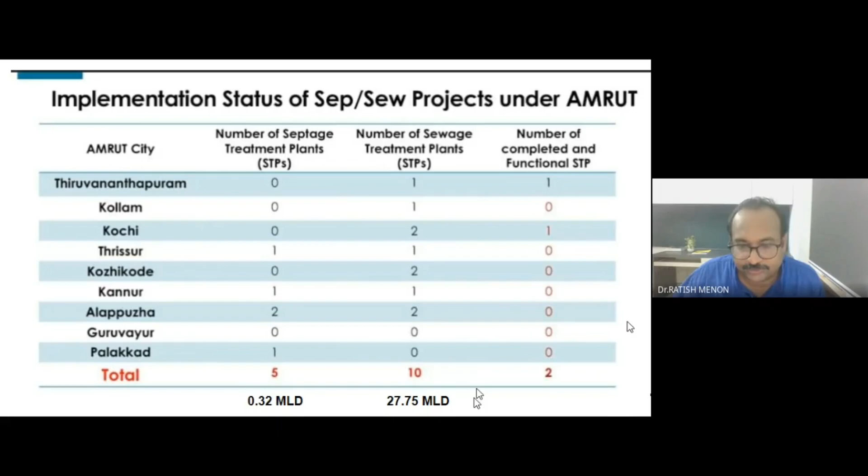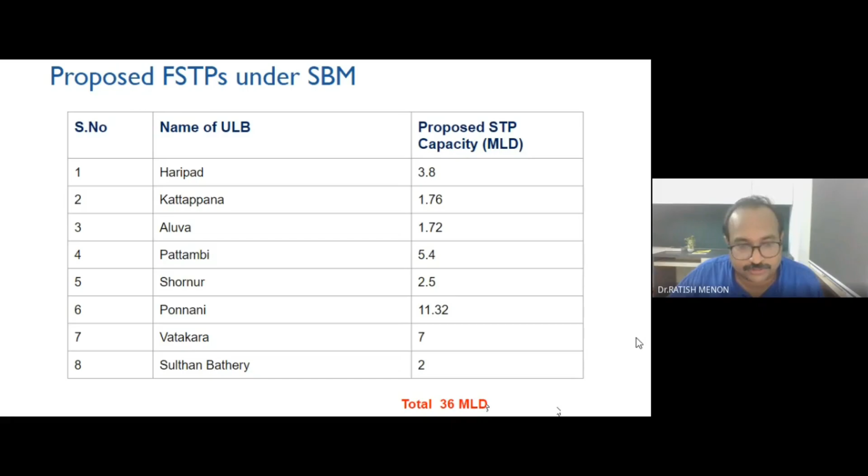In SBM, nothing has been implemented so far, but DPR preparation is underway, and a total 36 MLD STP capacity is proposed. If it comes in, it will serve a large population and improve the current scenario in Kerala.

So, major challenges in implementing these projects. Right now AMRUT 2 is ongoing, but there were a lot of issues in AMRUT 1. It was very difficult to complete the projects because of several challenges. One thing is rapid urbanization, which is creating a lot of liquid waste generation, and connecting everything together is very difficult.

We have to give more focus on on-site sanitation systems. The thrust has always been like 70% for FSTP and 30% for STPs. But land availability is a big issue in Kerala.

Another major factor is lack of public support, the 'not in my backyard' approach, where everybody understands that liquid waste has to be managed, but nobody wants the treatment plant near their house. To some extent this could be because of lack of awareness on wastewater management, so that's another challenge that needs to be resolved.

Then, ULBs need technical support in selecting appropriate technologies for their conditions, especially while preparing the DPRs. The ULBs have a very difficult situation understanding different technologies and comparing their efficiencies. Normally a consultant prepares the DPR, and they really need technical support to understand or vet these proposals.

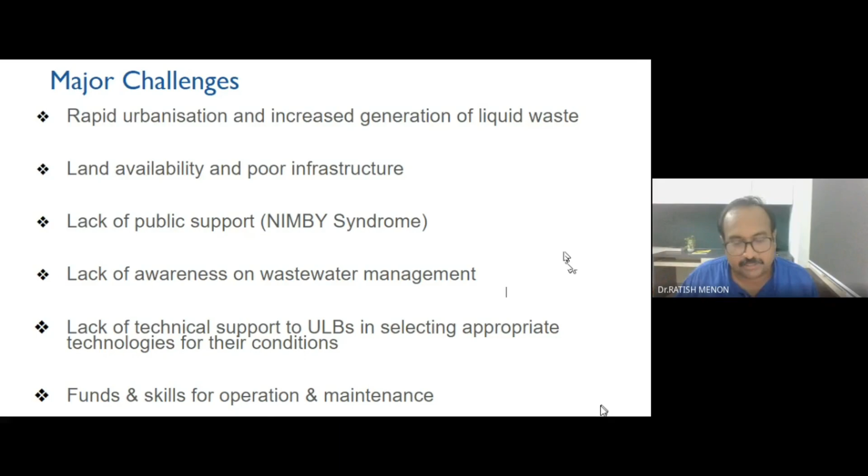Then, funds as well as skills for operation and maintenance. ULBs need their own funds to maintain and operate, and really skillful operators are needed. There is a huge gap in the skilled labor available for STP operation. There needs to be some way of bridging that gap and increasing the capacity or skills of operators, because a skillful operator can reduce the cost of operation in the STP. If the operator is not highly skilled, there can be many issues in the treatment plants.

Now, what is the way forward? That is something we need to discuss after this session. But I have written down some points. This is not an ultimate list, but it is open for discussion.

We have to have integrated planning for cities. In some places we have to go for centralized systems, sometimes decentralized systems, and wherever possible, we can go for nature-based treatment systems. At least at the institute level, for a hospital or an apartment complex, we can push for the nature-based treatment system.

Where space is constrained, go for a compact electromechanically operated system. Then promote fecal sludge and septage management in Kerala, because most houses use on-site sanitation septic tanks, and FSTP is a must for treating the septic waste. Adequate provision for O&M has to be provided at the planning stage itself.

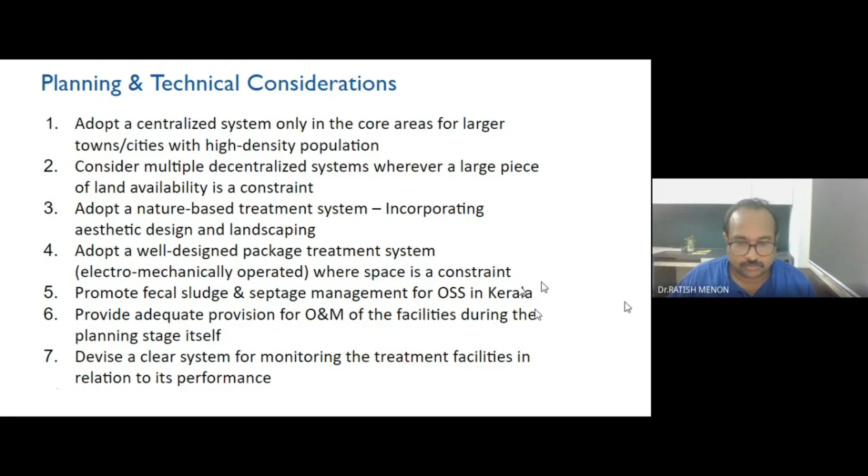Then, monitoring of these treatment facilities. There should be a clear system. If we are using the on-site sanitation approach, there should be a clear system for monitoring the conveyance, emptying, and also the treatment plant operations. That needs to be given importance. Then, social and awareness generation considerations.

People have to visit the best practices. Most of the time, people lack trust on the technology or the implementing agency, so they need to see the completed project to understand how it works. Then a mass IEC campaign may be needed.

The DPR proposals have to come from the grassroots level. We have to involve the residents and community in the planning process itself, rather than encountering them during the construction phase. Then capacity building of the key stakeholders, especially for selection of appropriate technologies, is a major thing to do.

There should also be a mechanism to handle public grievances. I acknowledge the Water Institute, Kerala, for the content of these presentations. So with that, I would like to wind up my session. Thank you.